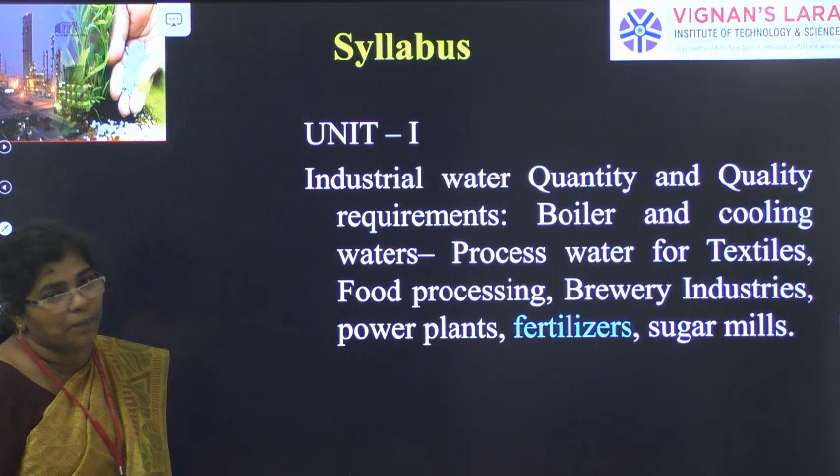So the fertilizer industry is made up of companies that represent the entire supply chain, from production to distribution to retail, all working together, whether organic or inorganic fertilizer, everything from the raw materials, that is consumption, production and distribution to the retailers. Mostly the retailers are mainly the farmers. In a safe and sustainable manner they will be giving.

Fertilizers are substances that supply one or more chemicals required for plant growth. Our country is an agricultural country and this plant growth is very much essential. The primary objective of this industry is to ensure the inflow of both primary and secondary elements that are required for crop production in the desirable quantities.

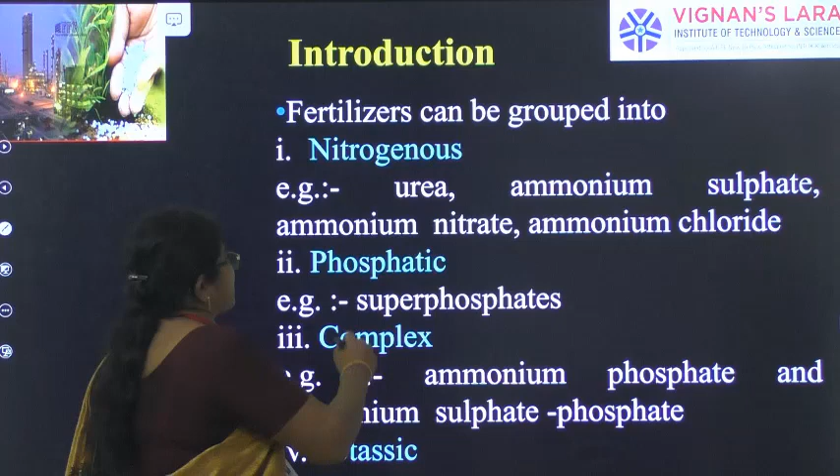So we can divide fertilizers into four types: nitrogenous, phosphatic, complex and potash. Today we will be seeing about the nitrogenous fertilizer industry, that is the production of urea. Urea is the main fertilizer that is used in most agricultural land, and it is also available everywhere throughout the country. So we are going to see about urea.

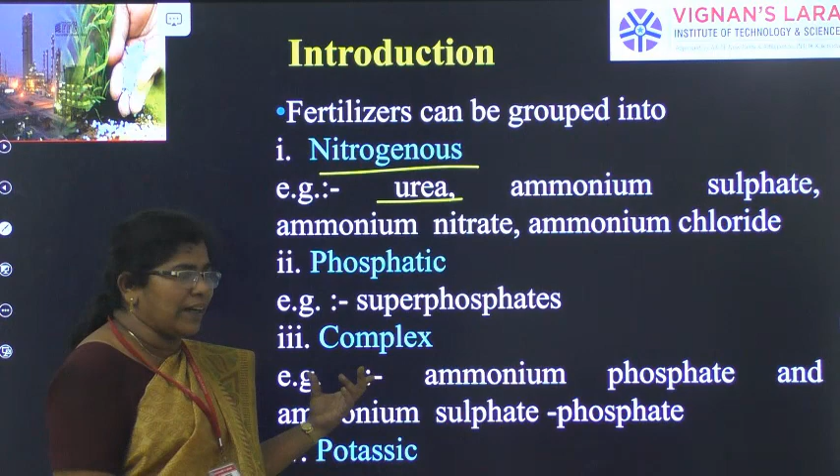Some of the other nitrogenous fertilizers are ammonium sulfate, ammonium nitrate, ammonium chloride, all ammonium based nitrogenous. The next one is phosphatic, that is superphosphate, phosphates. Complex is the mixing of nitrogenous and phosphorus, that is ammonium phosphate, ammonium sulfate phosphate, like that. And potassium is potash, that is a different form of fertilizer.

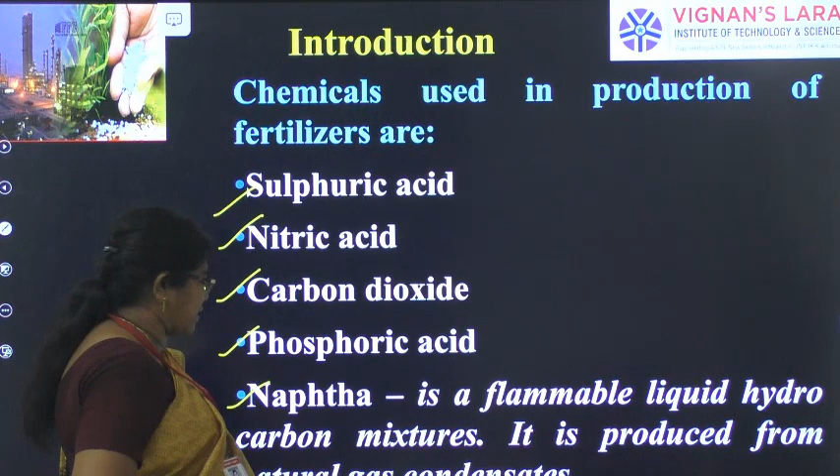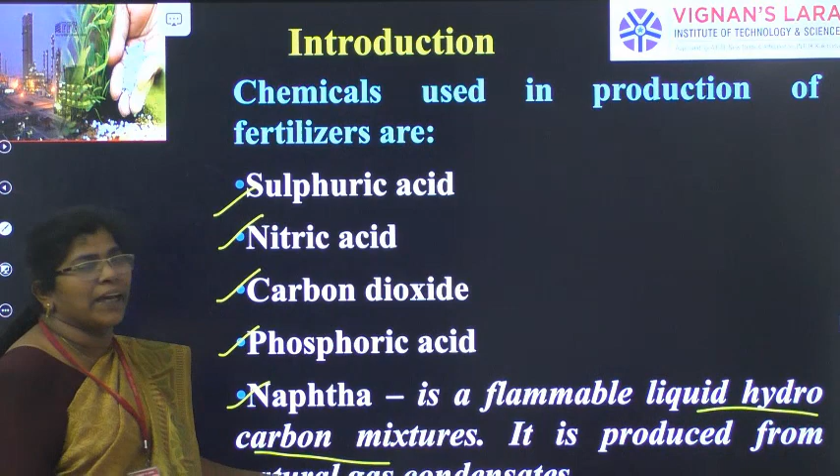Mostly the chemicals that are used in the production of fertilizer are sulfuric acid, nitric acid, carbon dioxide, phosphoric acid, naphtha or natural gas. Naphtha is a flammable liquid that comes from the production of petroleum, that is a hydrocarbon mixture, right? It is mostly coming from the natural gas condensate.

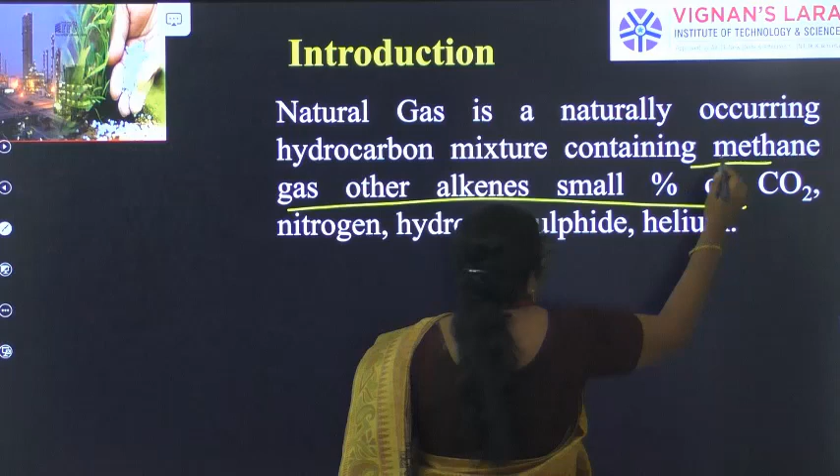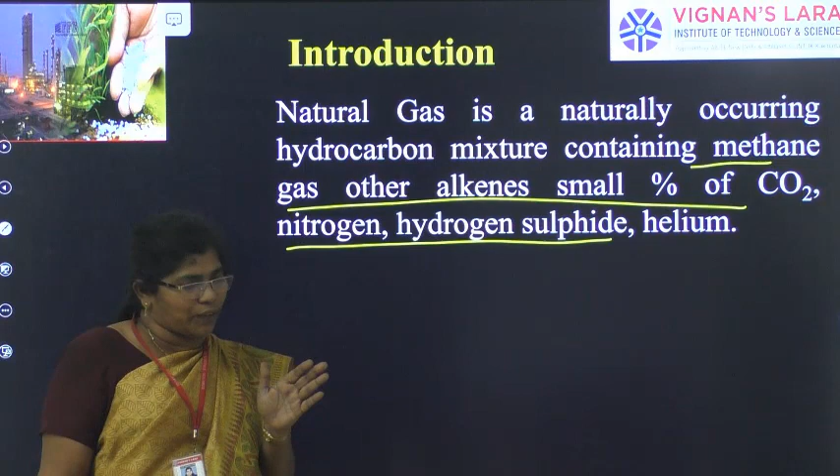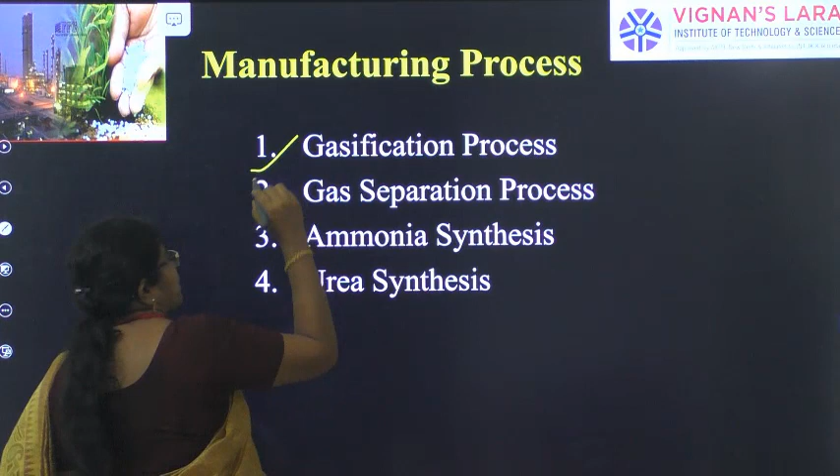Natural gas is a naturally occurring hydrocarbon mixture containing methane gas, other alkanes and a small percentage of CO2, nitrogen, hydrogen sulfide and helium. So naphtha or natural gas will be taken as a raw material for the production of urea. For the production of urea in the fertilizer industry, we have four processes: the gasification process, gas separation process, ammonia synthesis process and urea synthesis process.

First we will go in for the gasification process. It is the formation of the gases CO2, N2 and H2, so we call it the gasification process. Here two processes are there: one is gasification, the next one is the gas separation process. The main raw material is naphtha or natural gas. The first step is steam reforming, where air and steam are allowed to move into the steam reforming section, where naphtha and natural gas are allowed to sink into it.

So what is air? Air is ordinary air which has a high amount of nitrogen. What is steam? Hot vapor, we call it steam, right? So this naphtha or natural gas will be acted on by air and steam in steam reforming, and it will form CO, H2 and CO2: carbon monoxide, H2 gas and carbon dioxide gas.

Next, this gas is allowed to pass through the shift converter. That is, from steam reforming, where naphtha or natural gas is added with steam and air, it will form CO, H2 and CO2. Next it is sent to the shift converter, where again it is acted on by air and steam. So at the end of this process, CO2, N2 and H2 will be formed: nitrogen gas, hydrogen gas and carbon dioxide.

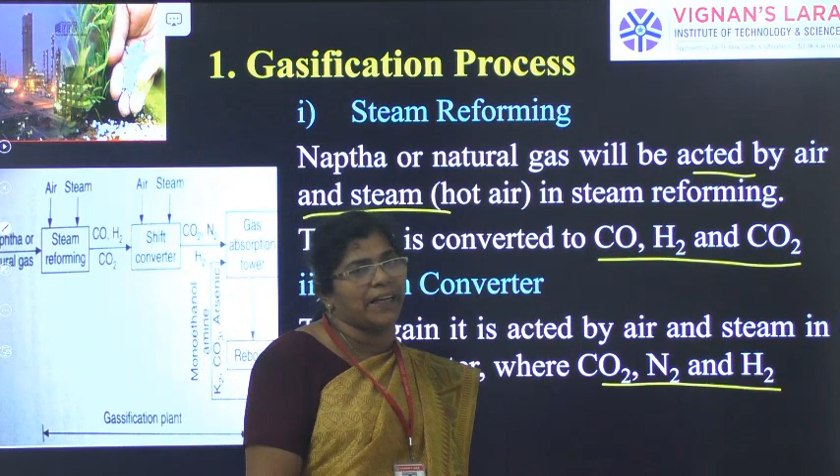This carbon dioxide will be absorbed by the gas absorption tower, and it will be separated. The CO2, N2 and H2 from the shift converter is taken to the gas absorption tower. This gas absorption tower will absorb the gas, and the remaining gas will be taken to the reboiler.

In the reboiler the CO2 gas will be taken, and it is the input for the urea synthesis plant, which is the fourth process. So the CO2 is here, it will be taken to the urea synthesis plant. From the reboiler, the K2CO3 and arsenic which are present in the natural gas will be again sent to the gas absorption tower, which will help in the formation of H2, N2 and CO.

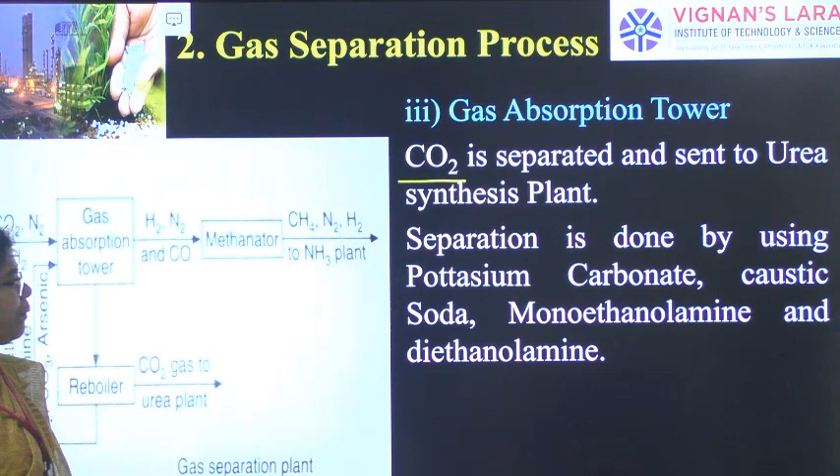So the next one is the gas separation process. Mainly in the gas absorption tower CO2 is separated and sent to the urea synthesis plant. Separation is done by potassium carbonate, caustic soda, monoethanolamine and diethanolamine. This is the main thing that is used: potassium carbonate, caustic soda, monoethanolamine and diethanolamine.

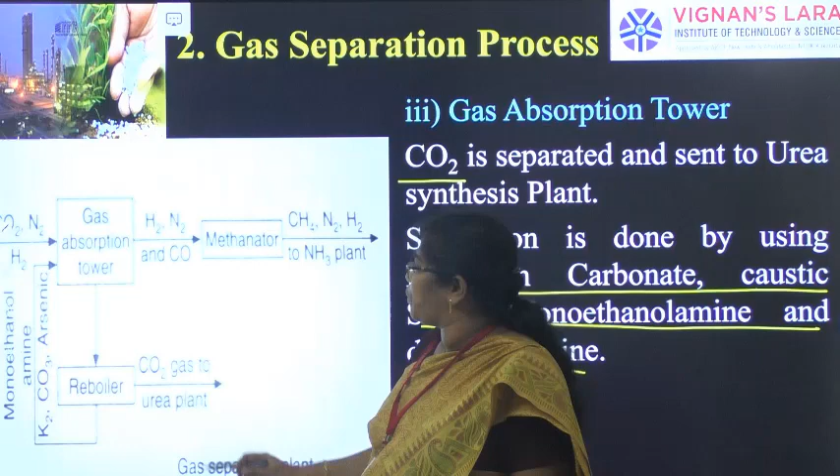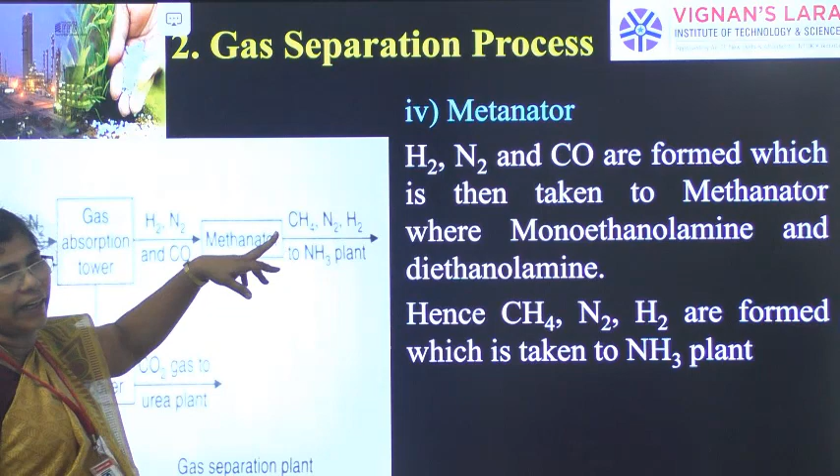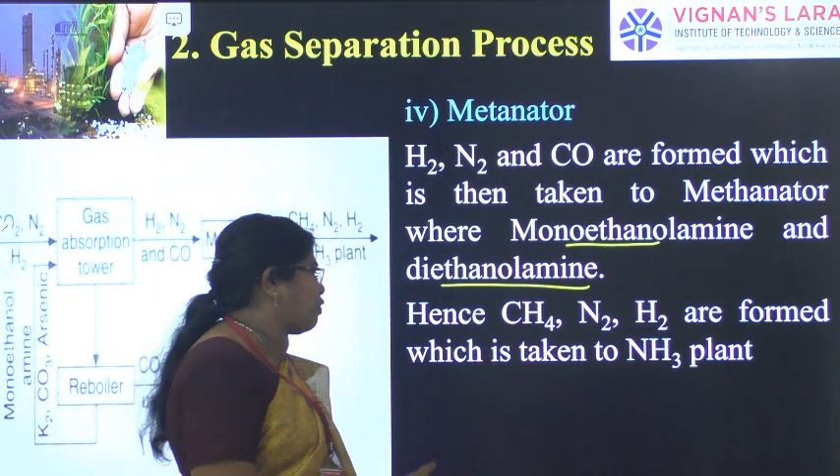When it is used to take the CO2 gas, the remaining K2CO3, arsenic is again sent into the gas absorption tower for the next reaction, and the product coming out is H2, N2 and CO, which is taken to the methanator. In the methanator, it is reacted with monoethanolamine and diethanolamine, and CH4, N2, H2 is formed, which is taken to the next process, the ammonia synthesis process.

So see here, this is the gasification process and gas separation process. This naphtha or natural gas is taken to the steam reforming. In the steam reforming, air and steam are allowed to mix with it, by which CO, H2 and CO2 is formed, which is taken to the shift converter, where again air and steam pass through it. It forms CO2, N2 and H2.

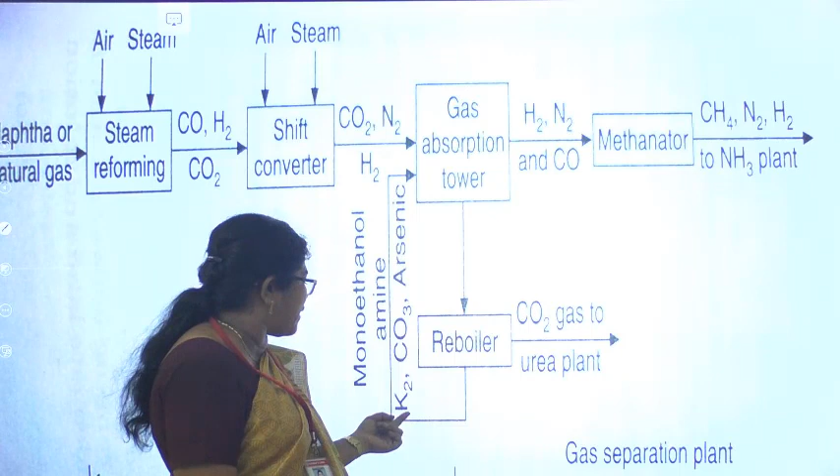The CO2, N2, H2 is taken to the gas absorption tower, from which gases like H2, N2, CO will be taken to the next step, and the remaining gas will be absorbed and taken to the reboiler. In the reboiler, it is acted on by the potassium carbonate, monoethanolamine, diethanolamine and others. The CO2 will be taken for the urea synthesis. The byproducts, K2CO3 and arsenic, will be again taken for gas absorption for the further process.

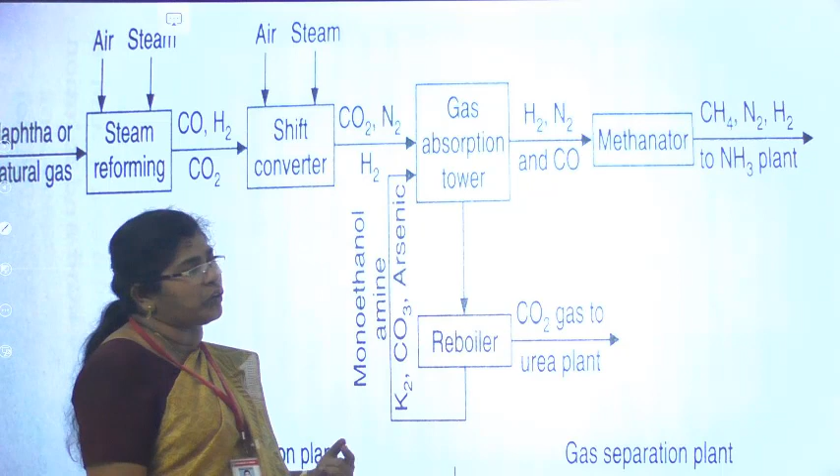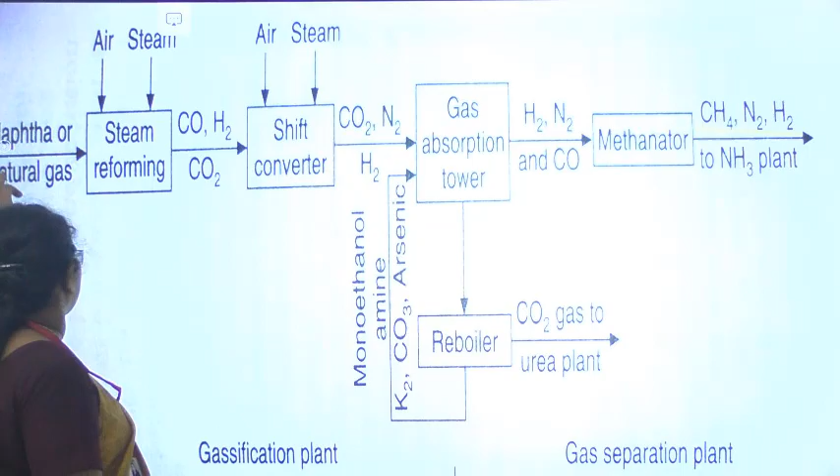Next, H2, N2 and CO will be taken to the methanator, where diethanolamine and monoethanolamine are again added, and CH4, H2 and N2 will be formed, which is taken for the next process, the ammonia synthesis. So the third step is ammonia synthesis. CH4, N2, H2 is taken to the compressor.

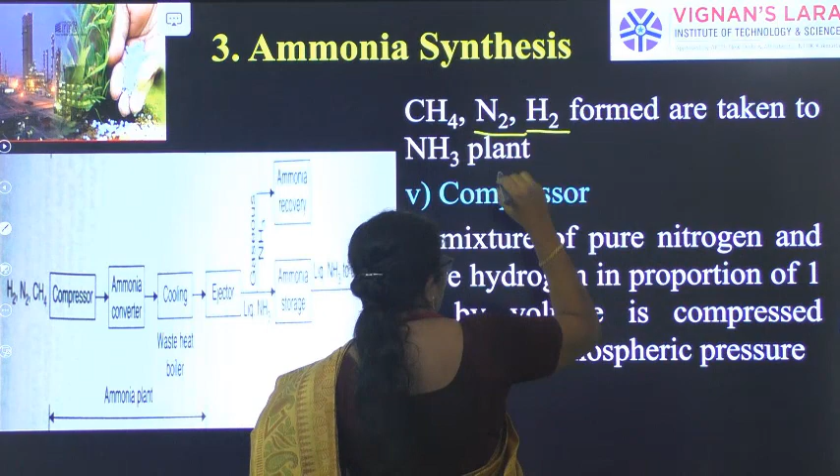A mixture of pure nitrogen and pure hydrogen in the proportion of 1:3 by volume is compressed under 200 atmospheric pressure. So here nitrogen is there, hydrogen is there, in the proportion of 1:3. 1 part of nitrogen with 3 parts of hydrogen is compressed at 200 atmospheric pressure, and next it is taken on.

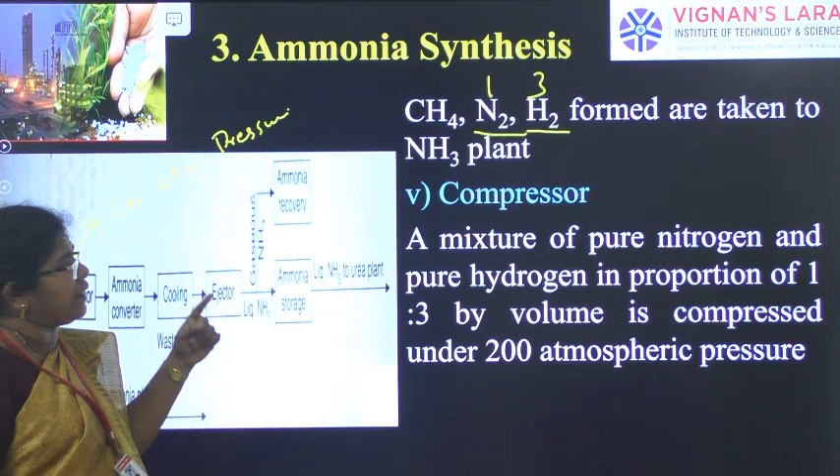That is the formation of ammonia, so NH3 will be formed. It will be taken to the ammonia converter. The mixture is passed through the catalyst chamber heated to 500 to 550 degrees centigrade. In the ammonia converter, the gas compressed at 200 atmospheric pressure is heated to 500 to 550 degrees centigrade, by which NH3 is formed.

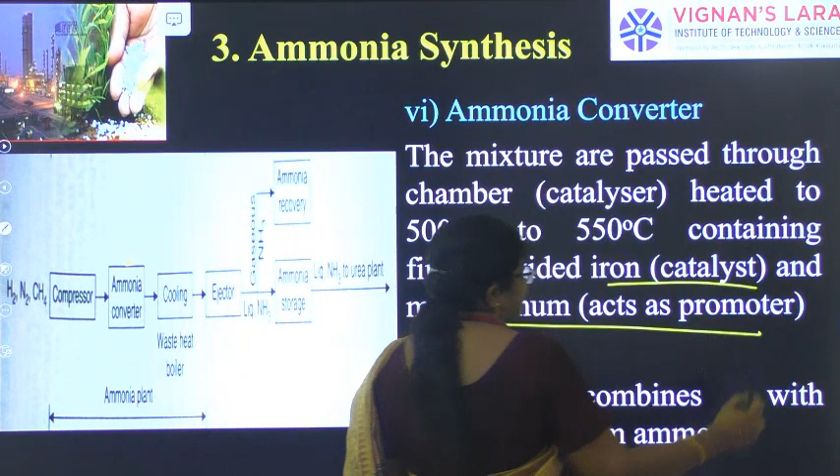So what is the catalyst added here? It is iron and molybdenum. Iron is the catalyst and molybdenum acts as a promoter in the ammonia converter, and then the ammonia will be taken to the next process, the cooling process. So nitrogen combines with hydrogen to form ammonia. The remaining nitrogen and hydrogen are separated here in the cooling process.

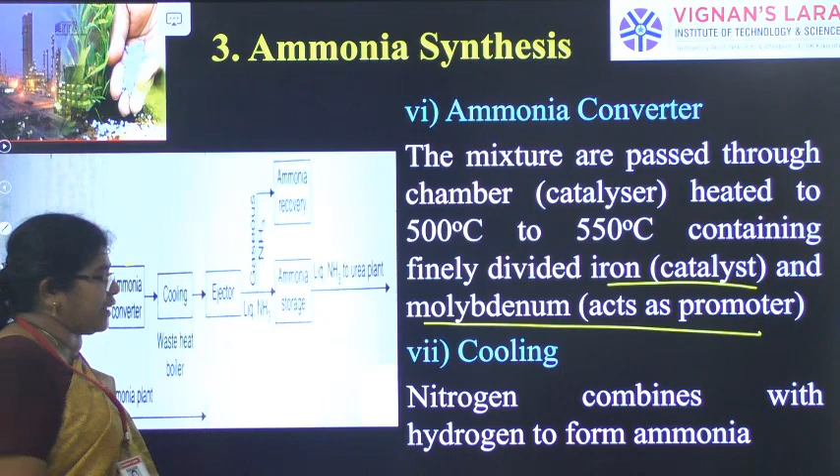So at 200 atmospheric pressure, 1 part of nitrogen mixed with 3 parts of hydrogen forms NH3. Then it is taken to the ammonia converter where iron acts as a catalyst and molybdenum acts as a promoter, by which NH3 is formed, and it is cooled down, by which we get a very intense form of NH3. That is the formation of ammonia. Next, this ammonia is taken to the ejector.

The gases containing ammonia and unreacted nitrogen are cooled under pressure, when ammonia is liquefied. So when it is cooled down again, it will form in a liquefied form. It is heated, cooled and cooled, so it is formed in a liquefied form. This liquid ammonia is being taken for further storage.

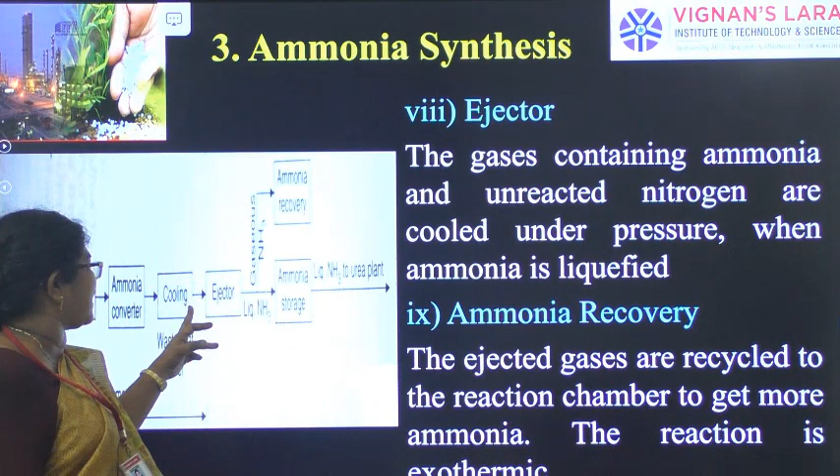In between, the unreacted nitrogen and unreacted ammonia will be there, which will be taken in gaseous form to the ammonia recovery plant, where the gaseous NH3 will be retrieved. So the next one is ammonia recovery. The ejected gases are recycled in a reaction chamber to get more ammonia. The reaction is exothermic, meaning heat is given out.

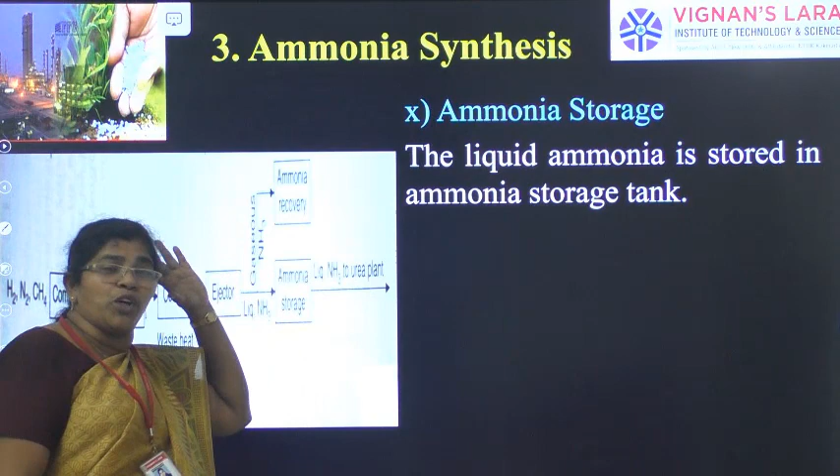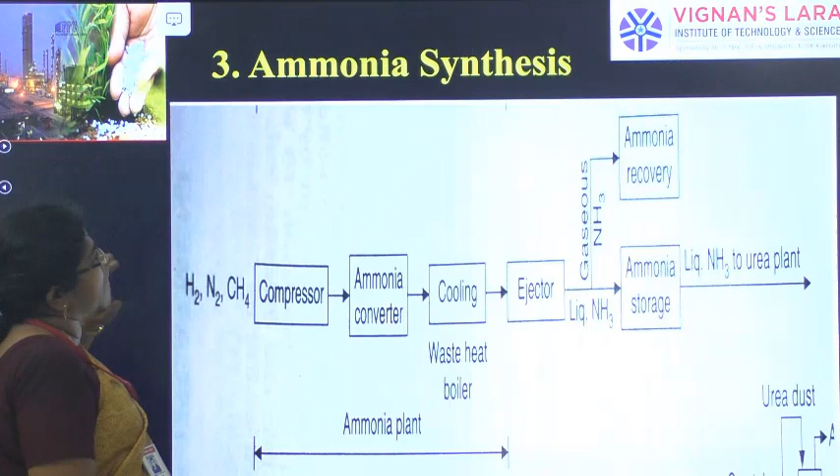So the liquid ammonia is stored in the ammonia storage tank. Then this ammonia from the storage tank and the CO2 from the gasification process, gas separation unit, will be taken as an input for the fourth process, that is the urea synthesis plant. So the next one is urea synthesis.

In the urea synthesis plant, the CO2 and NH3 are taken to the urea autoclave, where it is heated to a very high temperature, where ammonium carbamate in liquid form is there. Then it is heated, filtered, vacuum crystallized, centrifuged, by which we will get crystals or granules. To get the dust form of the prills, we go in for the prilling towers. So this is the urea synthesis plant.

This NH3 we will be getting from the ammonia synthesis. This we are getting from the gas separation plant. Carbon dioxide and NH3 are taken into the urea autoclave. So the CO2 from the gas separation process is mixed with the ammonia to form urea.

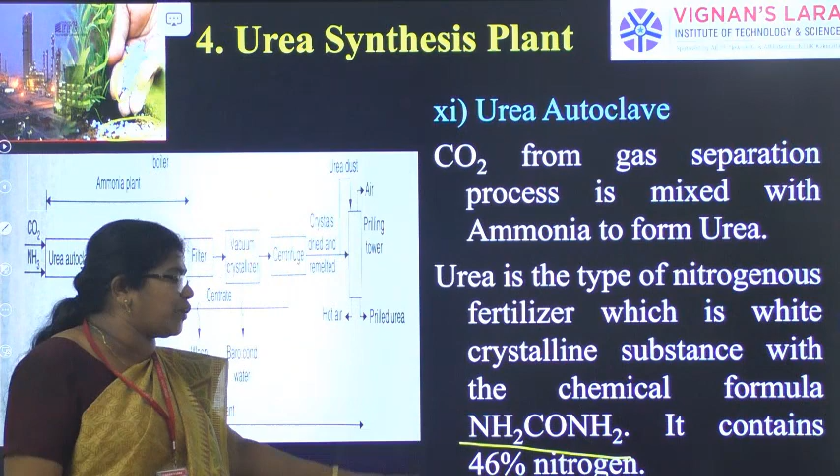Urea is a type of nitrogenous fertilizer which is a white crystalline substance with the chemical formula NH2CONH2. So you can see here, this is a crystalline granular form of the fertilizer urea. So this is NH2CONH2. It contains 46 to 47% of nitrogen in it.

So CO2 and NH3, that is carbon dioxide and ammonia, are mixed vigorously at a pressure of 180 atmospheres, at a temperature of 135 degrees centigrade, and ammonium carbamate is formed in liquid form. So you can see here, in the urea autoclave the temperature maintained is 135 degrees centigrade. At 135 degrees centigrade, carbon dioxide reacts with the ammonia and forms NH2CONH2, which is urea.

This ammonium carbamate is formed in liquid form. This is the urea that is formed in liquid form. From this liquid, the unreacted gases will be taken to the absorption tower, where more ammonia will be retrieved. The CO2 and NH3 which have not reacted will again be taken to the absorption tower, where more ammonia will be formed. This ammonia will again act as an input to the autoclave.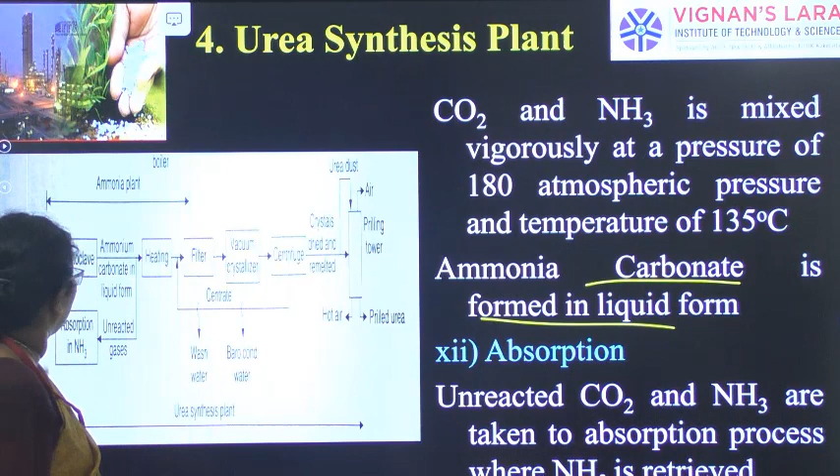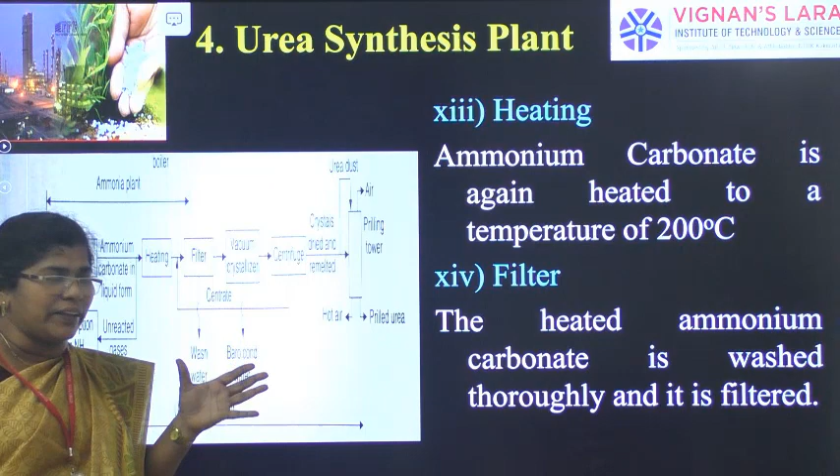So the next process is the heating process. The ammonium carbonate in liquid form is again heated to 200 degrees centigrade. From the heater, it is then taken to the filter. The heated ammonium carbonate is washed thoroughly. So after heating to 200 degrees centigrade, it is washed thoroughly and filtered, and the filtrate will be removed.

The next one, we are going in for vacuum crystallization. The filtered material, NH2CONH2, will be taken to the vacuum crystallizer. Due to the high vacuum, it is formed into crystals.

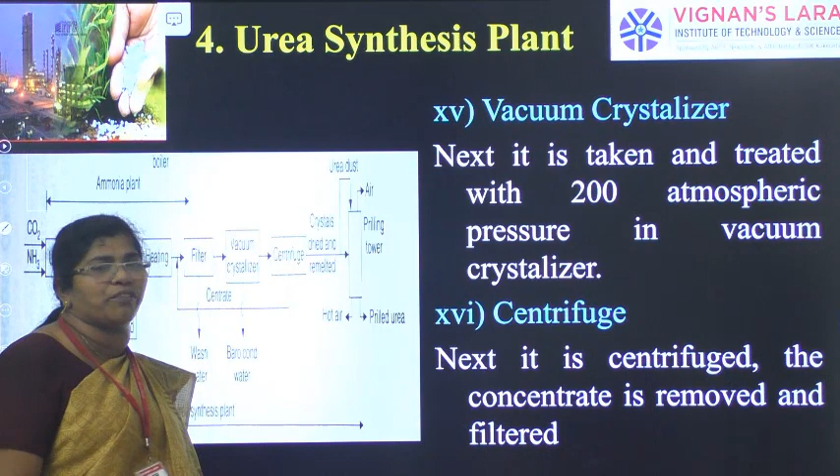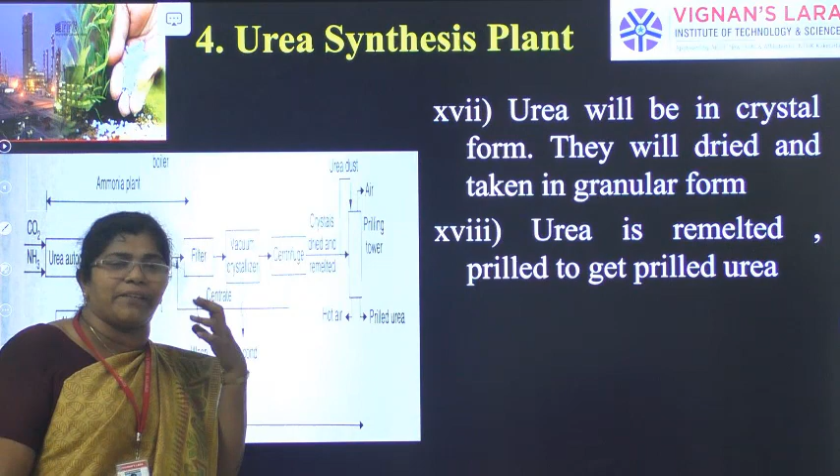Next it is taken to the centrifuge, where the concentrate is removed and we get the granular form of urea. The urea will be in crystal form. It can be dried and remelted if you want to take it to the prilling tower. If you want it in granular form, you can take it in granular form, or to take it as a dusting material, we have to go in for the prilling tower.

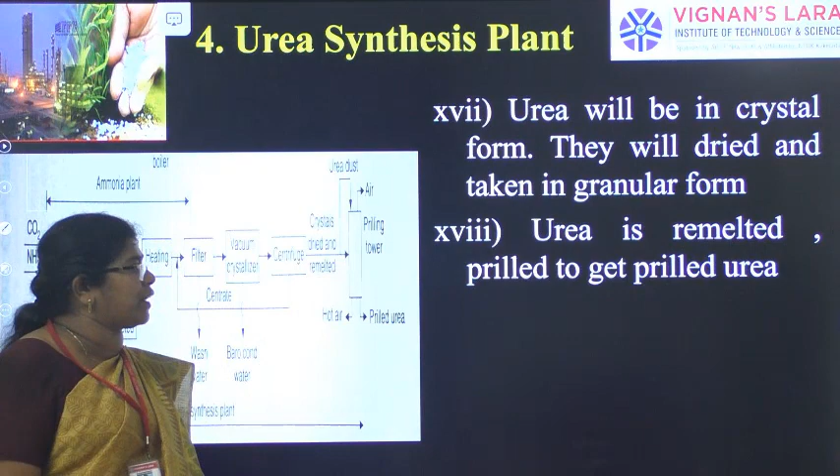So what is prilling? Prilling is a method of producing reasonably uniform spherical particles from molten solids. It produces them from very strong solutions or slurries. Due to prilling, we will get small solid forms. Higher temperatures require taller towers.

Usually for prilling, we go in for a 50 meter tower. The height of the room is 3 meters, so the prilling tower will be 10 to 15 times that height, around 50 meters, with higher temperature maintained inside.

The hot air will be released here. The urea or crystal materials are taken here where it is prilled, and the prilled urea is taken here. At the bottom, hot air will be there, the prilled urea will be there, and the remaining air will be taken out of the prilling tower.

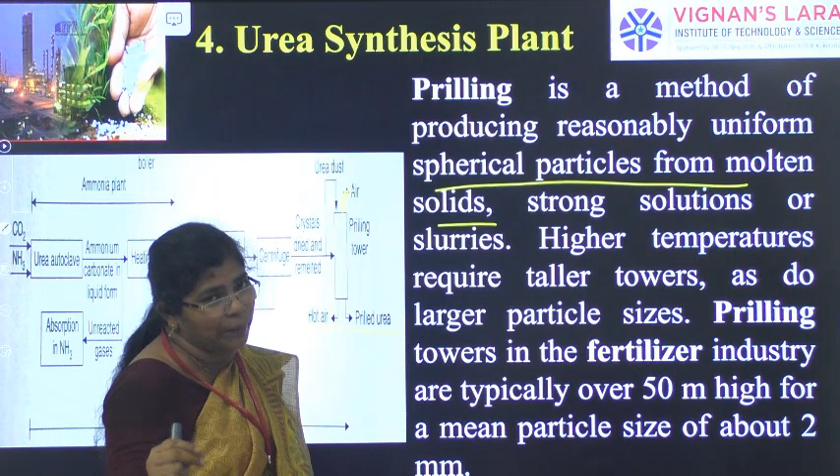Prilling towers in the fertilizer industry are typically over 50 meters high for a mean particle size of about 2 mm. To get a urea size of 2 mm, the prilling tower height should be around 50 meters. This is one of the prilling towers you can see here.

A prill is a spherical pellet made by cooling falling liquid. Liquid urea is pumped into the top of the tower where there is a spinning drum. Urea passes through holes in the drum, and the urea falls while inert gas is blown upward.

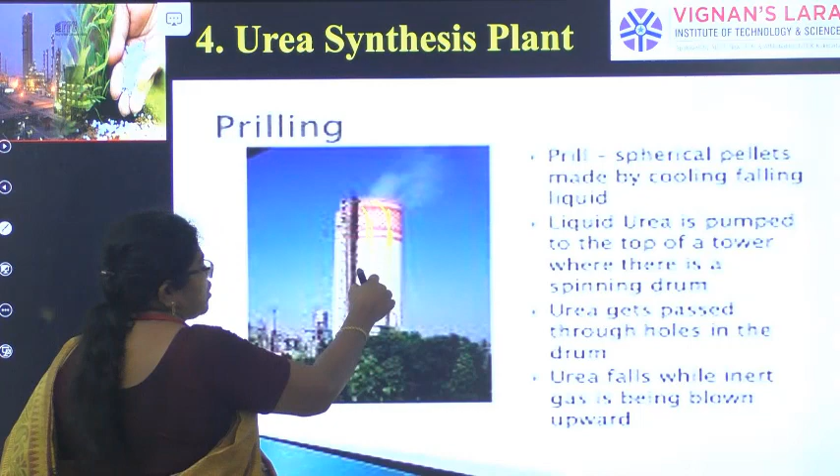So when the gas is being blown upward, the urea is falling through these small holes. When it comes down, it forms solid particles around 2 mm in size.

What is the difference between prills and granules? Prills form smaller, more mono-dispersed materials where no additives are needed. Granules, on the other hand, form bigger and stronger particles which are more resistant to wear caused by transportation, and can be homogeneously blended with other granules based on particle size.

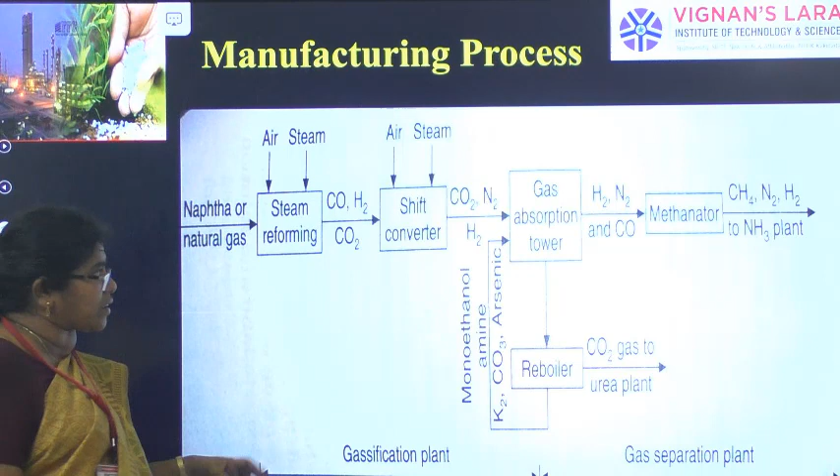So here, this is the whole manufacturing process of ammonia. Naphtha and natural gas are the raw materials taken into steam reforming, where air and steam are added into it. This forms CO, H2 and CO2.

The CO, H2 and CO2 are taken to the shift converter, where again air and steam are added, forming CO2, N2 and H2. These are taken to the gas absorption tower, which forms H2, N2 and CO.

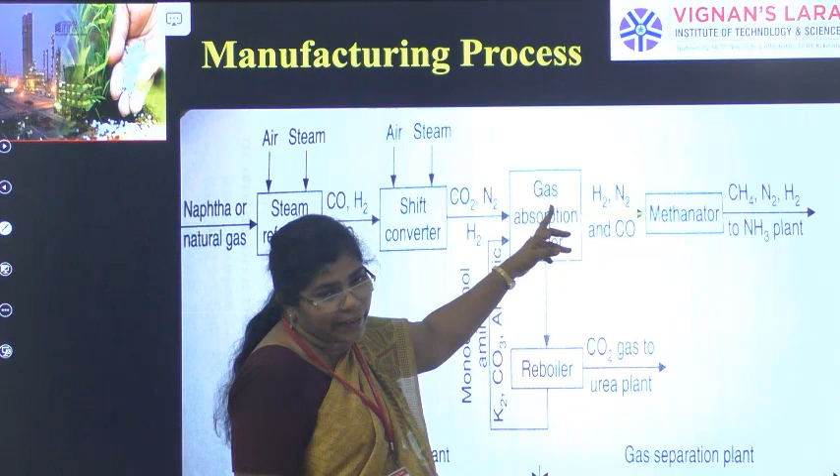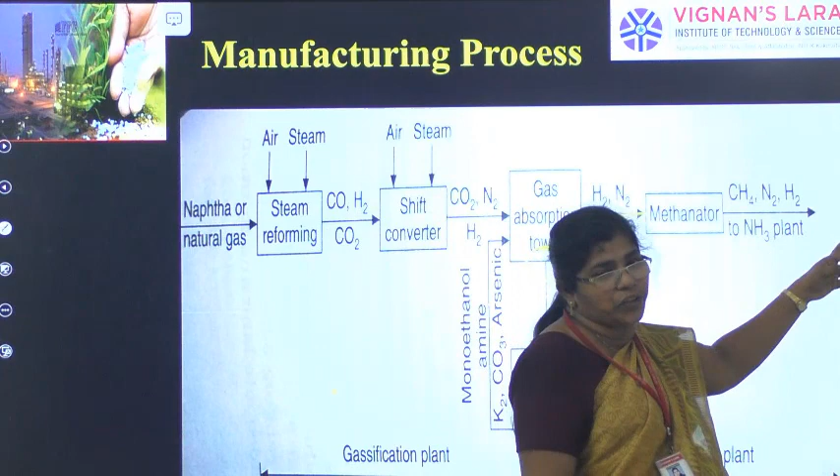The H2, N2 and CO are taken to the methanator, where diethyl amine and monoethyl amine are added, forming CH4, N2 and H2, which is the input for the ammonia synthesis plant.

Next is the ammonia synthesis plant. CH4, N2, H2 are the inputs, compressed to a high temperature at 200 atmospheric pressure, where ammonia is formed. The ammonia is converted using an iron catalyst, with molybdenum acting as a promoter.

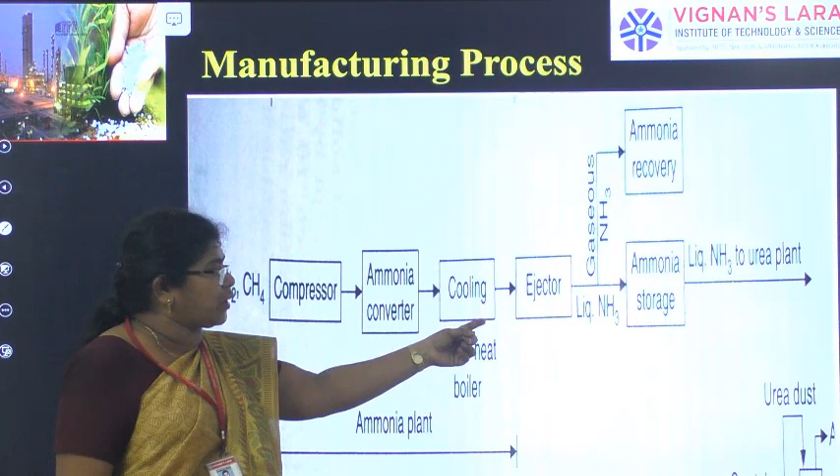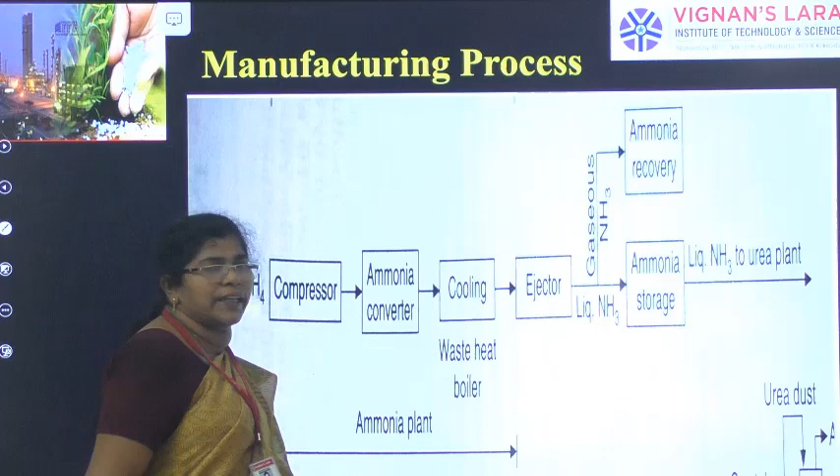Then it is taken to the cooling tower where it is cooled down, and then to the ejector. In the ejector, catalyst forms and liquid ammonia, NH3, is formed from N2, CH4 and H2. Some unreacted particles are absorbed as a gaseous medium and go for ammonia recovery.

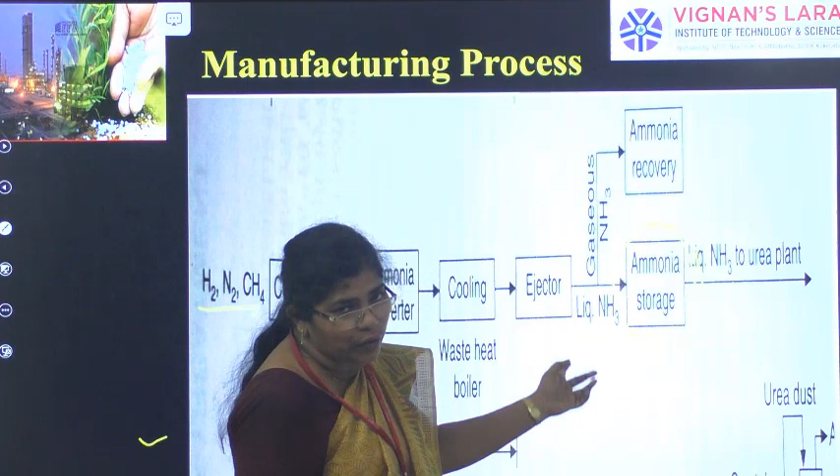This ammonia recovery is always taken into the urea plant. The liquid ammonia is stored in the ammonia storage tank, and whenever we want to go for urea synthesis, we take ammonia from here.

The CO2 from the gas separation plant and NH3 from the ammonia synthesis are taken to the urea autoclave, where a temperature of 135 degrees centigrade is maintained at a pressure of 200 atmospheric pressure. This forms ammonium carbonate. The main product, urea, is NH2-CO-NH2.

This is formed, and the unreacted ammonium carbonate is again absorbed, forming NH3, which is taken back as a raw material to the urea autoclave. The ammonium carbonate formed is again heated to 135 degrees centigrade, then washed thoroughly and filtered.

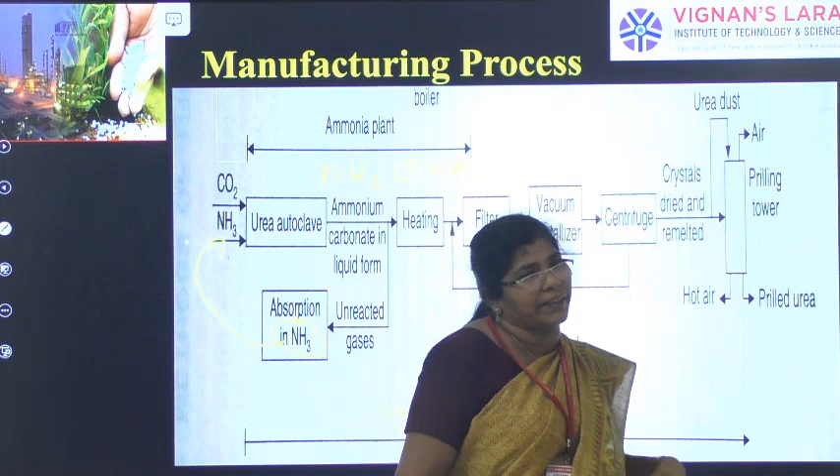From here we can take the centrifuge and get the granules. The urea dust is taken and again sent to the prilling tower. I told you the prilling tower for making 2 mm sized urea is 50 meters high. In the prilling tower, we get the prilled urea using hot air, where a drum will be there. The liquefied urea flows through it, gets stirred completely, and falls through so many holes, by which we get the prilled urea.

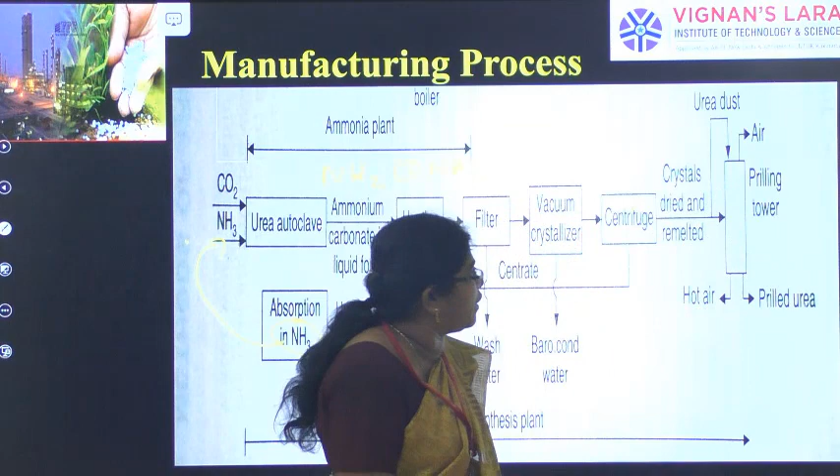Now we will see where we are using the process water. In the urea fertilizer plant, almost all the processes use process water - boiling, heating, cleaning the machineries, washing the urea, production of ammonia, air, heat - everywhere we are using the process water. So what is the waste water that comes from the fertilizer plant?

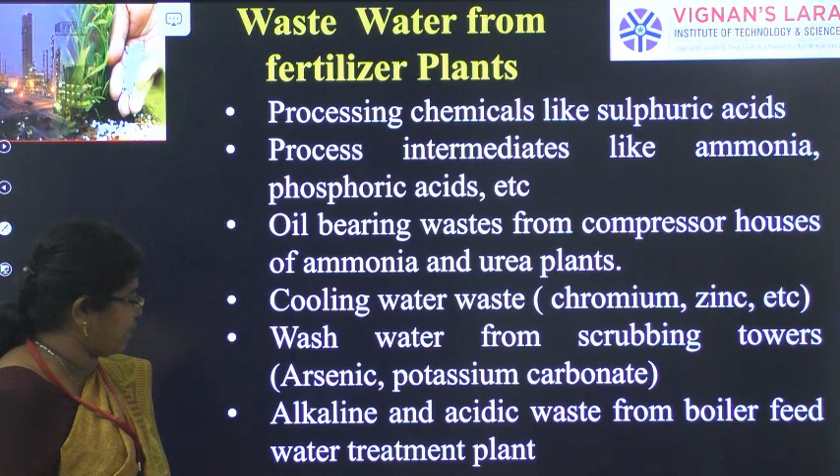Processing chemicals like sulfuric acid, ammonia, phosphoric acid, etc. Oil bearing waste from the compressor houses of ammonia and urea plants, cooling water waste containing chromium, zinc, etc. Wash water from scrubbing towers, arsenic, potassium carbonate, alkaline acidic waste from boiler feed water treatment. These are the things coming as waste water from the fertilizer plant.

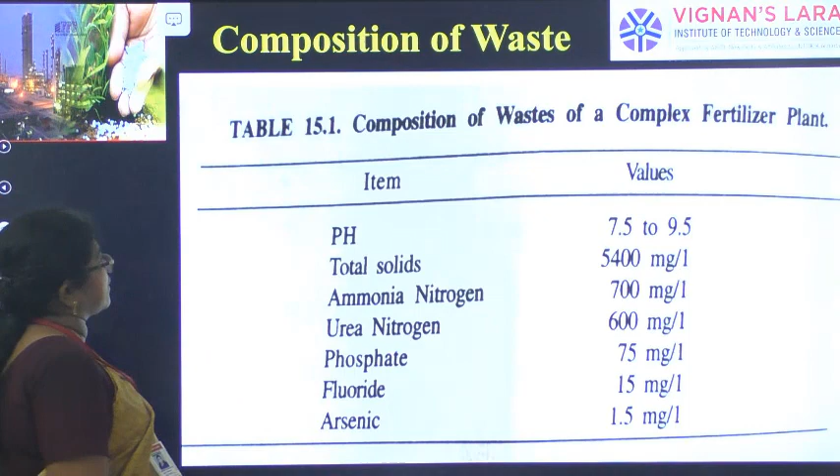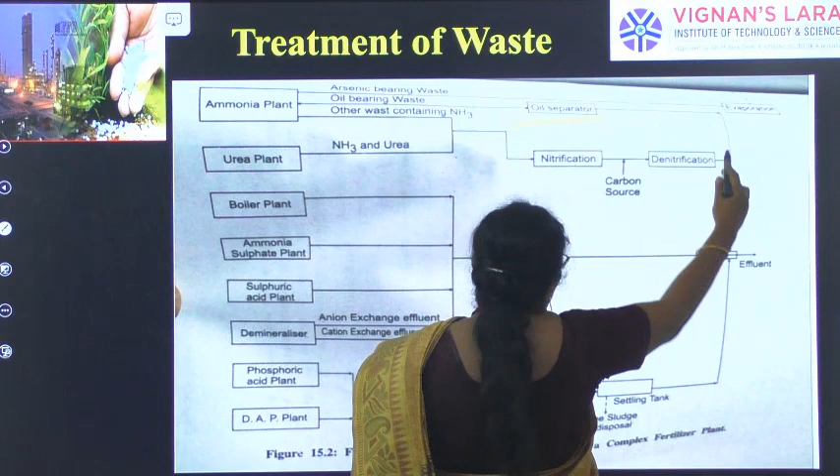So the ammonia plant waste will be having arsenic bearing waste, oil bearing waste and other waste, that is the NH3. First the oil bearing waste will go for oil separation. What is the process for oil separation? It is the skimming process. Then the arsenic bearing waste will be taken, heated and evaporated, by which we get the arsenic. The oil bearing waste is taken for the skimming process to remove the oils, and the wastewater will be taken for the effluent.

From the ammonia, the other waste NH3, and from the urea, the NH3 and urea will be taken and it will go for the nitrification and denitrification process. We have already seen about this nitrification and denitrification process, where it is a biological removal process by which ammonia is converted to nitrites and nitrates are converted to nitrogen gas, and the nitrogen gas is released into the atmosphere. After that, the remaining water is taken into the effluent.

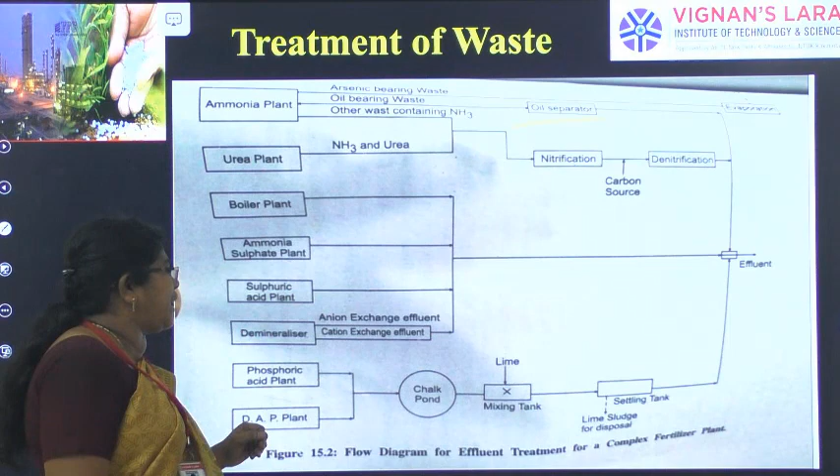So from the boiler plant, ammonia sulfate plant, sulfuric acid plant and demineralized plant - for demineralization, we go in for the ion exchange process, by which the ion is exchanged, with anion exchange effluent and cation exchange effluent. By this it can be demineralized, and the sulfuric acid plants have to be treated, and the ammonia sulfate boiler treatment plant - everyone will be taken as an effluent.

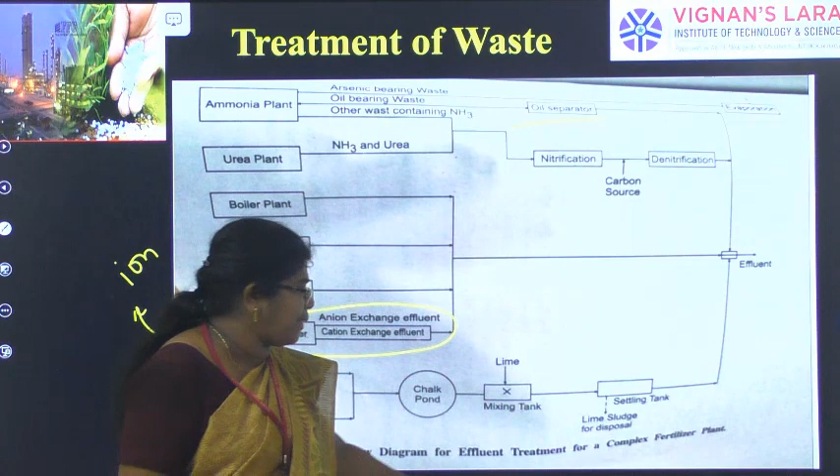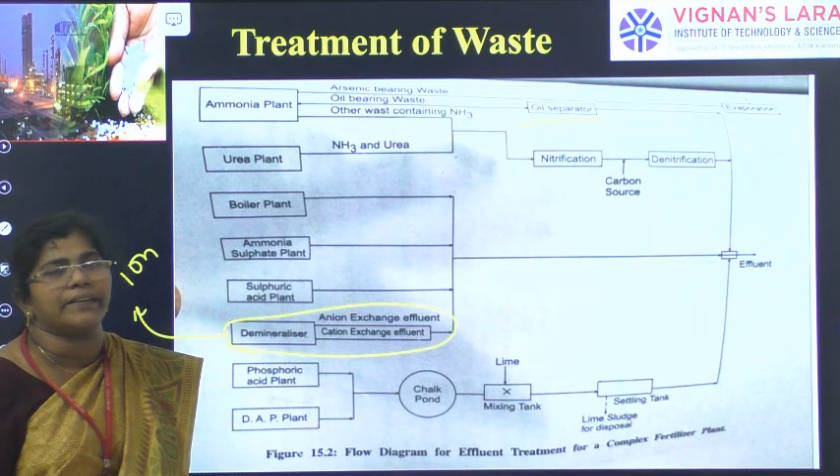Phosphoric acid plants and DAP plant have a chalk pond, where lime is added. This lime is added in the mixing tank and it is taken to the settling tank where it is allowed to settle. There the particles react with the lime and settle as lime sludge. The lime sludge is taken for disposal, and the remaining water is taken for the effluent. So all these plants' remaining water, after proper treatment, is taken as effluent and safely discharged into the water bodies.

So today's class we have seen about the fertilizer industry and how to form urea, what is the process water, what is the waste water, and we have seen the composition of the waste water, and we saw the treatment of the waste water. Next class we will see about the next industry.